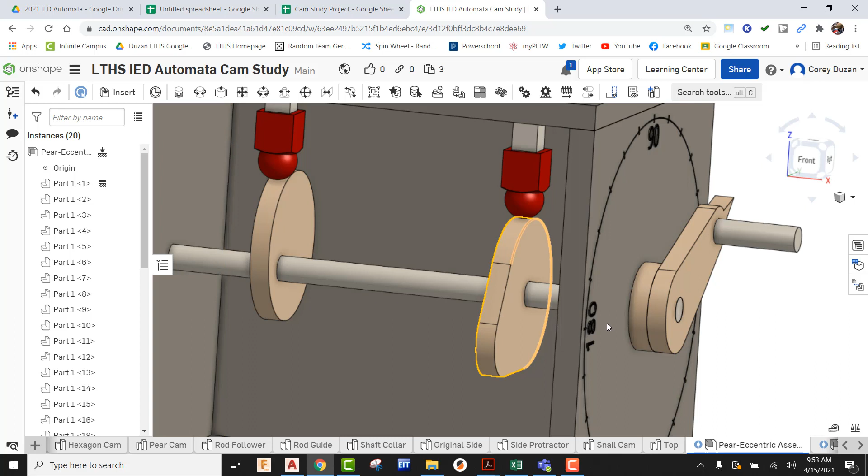I'm also sharing a view-only version of an automata. When we pick on that, this is what you're going to see. If we look down here, we can see one automata that has a pear and an eccentric cam in it. Another one down here, if we pick on that, we can see it has the hexagon and the snail cam in it.

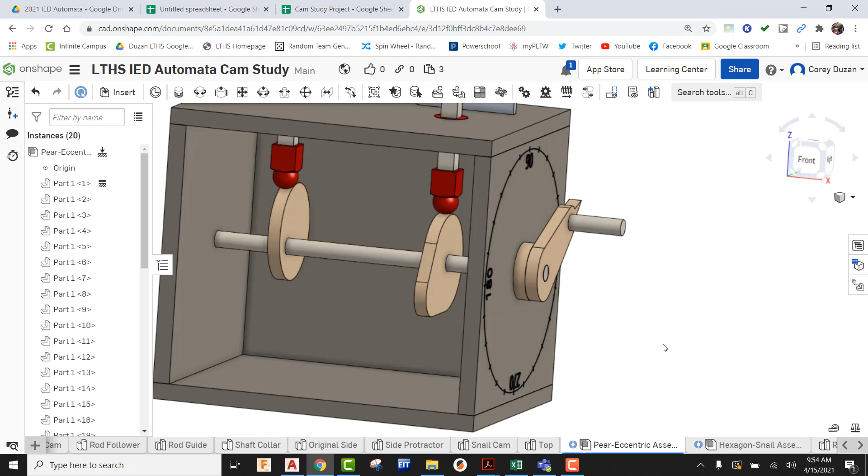So the person who's going to be studying the cam has to go out there and locate the assembly which that actual cam is in. In my case, I'm going to say I'm studying the eccentric cam. So I'm going to pull open that assembly. I can see that this is my eccentric cam, and this is basically where I'm going to start.

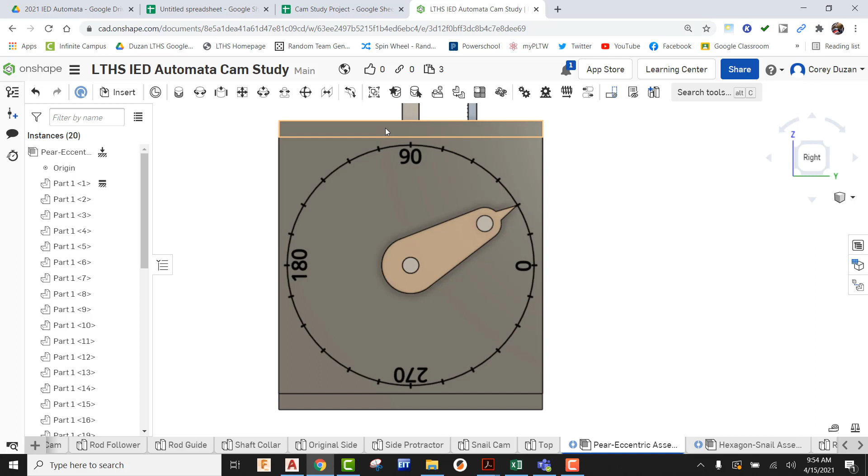If we were to change this view to the right side view, we can see that there are angle marks on the side of the box. We also have our crank handle, but it has a pointer on it. If we take a look at the Google Sheet that we have, we need to find the measurement for angle rotation 0 degrees.

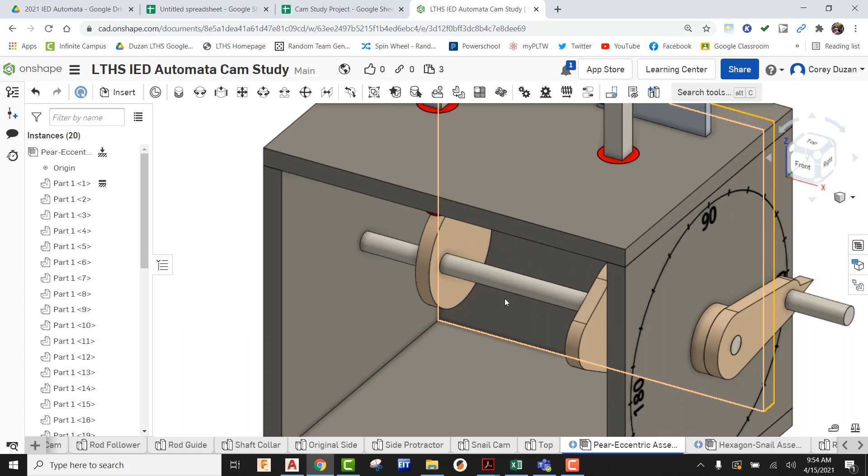I'm going to come back in here and physically grab this with my mouse. I'm going to take the pointer and try to get it as close to that 0 mark as you can. Once we have verified that's on the 0 mark, I can switch the view on this. And now, once again, make sure that you're locating the correct cam. In my case, I said I was doing eccentric. It's on the left-hand side, so I'm going to be doing all the measurement here on the left-hand side.

So to make things easier, instead of using the ruler, what we can do is find this feature down here at the bottom right-hand corner. There is the feature I'm talking about. It's measure, looks like a measuring tape. So I'm going to pick on measure.

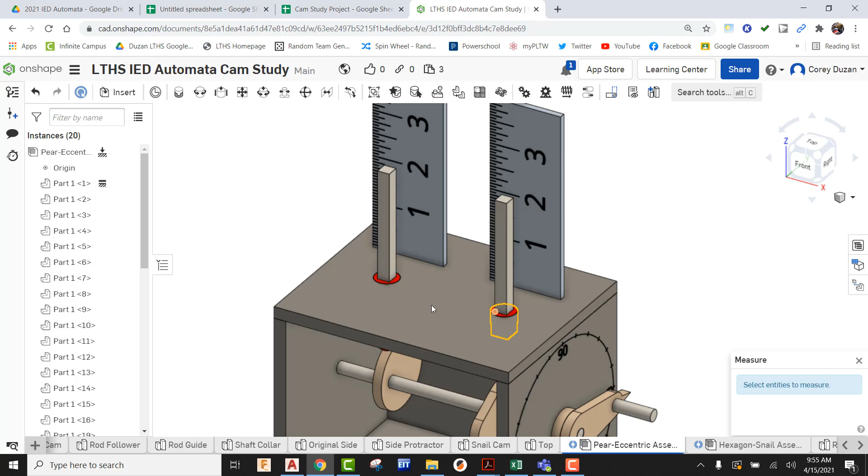Now what I'm going to do is pick on top of the box, and then I'm going to zoom in here and pick on the top of the follower rod. That is then going to give me this distance on top. So that distance is 2.361 from the follower rod top to the top of the box. I'm then going to go into my Google Sheet and type in that distance of 2.361 for my measurement.

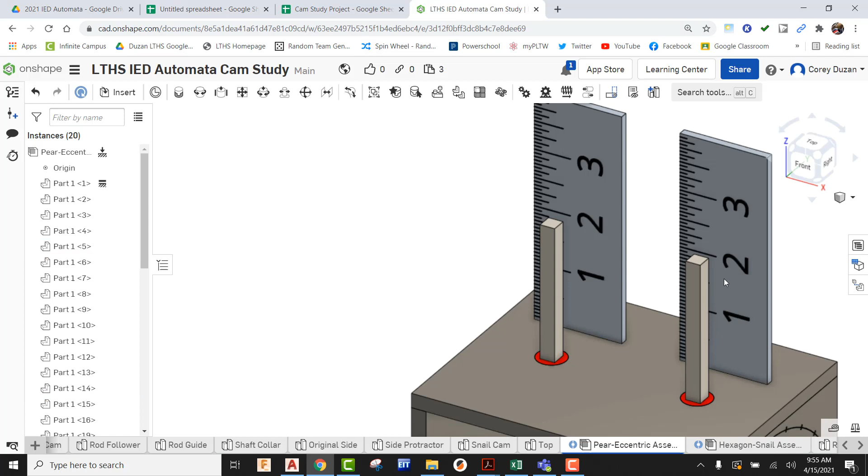I'm now going to jump back over into our automata assembly, switch this into my right side view, take my pointer, bring it up here, and bring it to 15. Like I said, it can just get somewhat close to that actual mark. That's close enough.

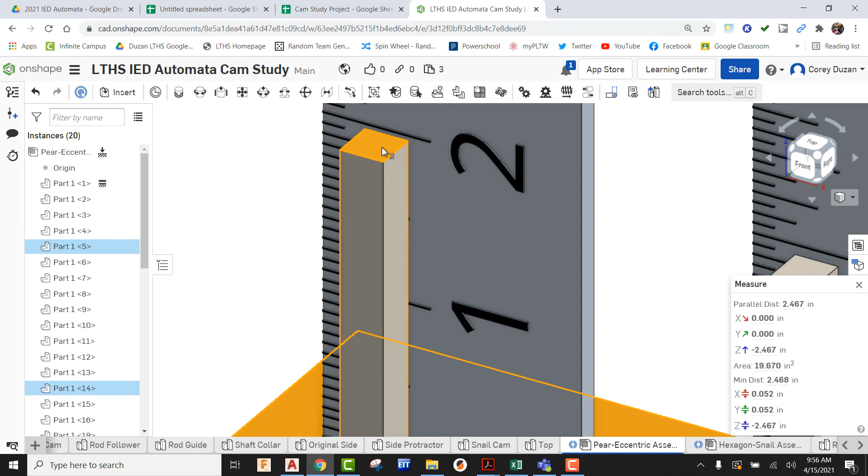Okay, now I'm going to come back in here and get my second measurement. Going back into measure, I'm picking the top of the box and then the top of the follower rod. I can see that is 2.467. Going back into my spreadsheet and typing in 2.467. That was at 15 degrees.

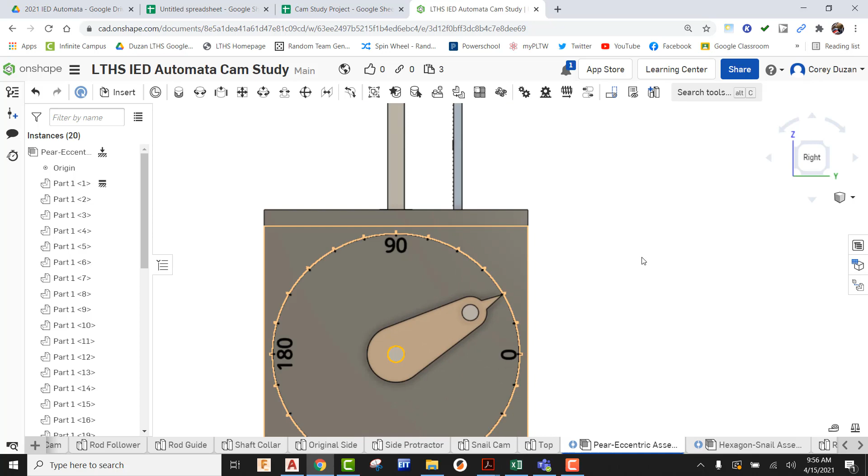Jumping back into Automata, switching this into my right side view. Now I'm taking that pointer and bringing it up here to my 30-degree mark. Pretty close. Bring that into an isometric view. Go back into measure, pick the top of the box, and then the top of the follower rod. I can see that is 2.568. Now I can come back in here and put in 2.568.

You're going to continue on with this process until you have basically 360 degrees, all with those measurements. Once you are done with that, you're going to be looking at a spreadsheet that has all sorts of measurements in it. Now for my case, I didn't want to give you the answers for an eccentric cam, so it's blacked out, but trust me, there are measurements underneath this.

So now what we want to do is create something called a motion graph. This is going to show the motion of that cam across 360 degrees. It's going to show you the up and down motion, the 360 degrees that we actually crank the crank handle.

All you have to do is come here and highlight all the measurements in these cells in B. You're then going to come up here and go to Insert, find Chart, and this line chart is going to show up. We can scoot this over a little bit and shrink this down in size. Then where it says measurement, I'm going to type in eccentric cam motion graph.

So this is telling us what this is going to be doing over 360 degrees. This is showing us the motion of that cam and the rotation of the actual crank handle.

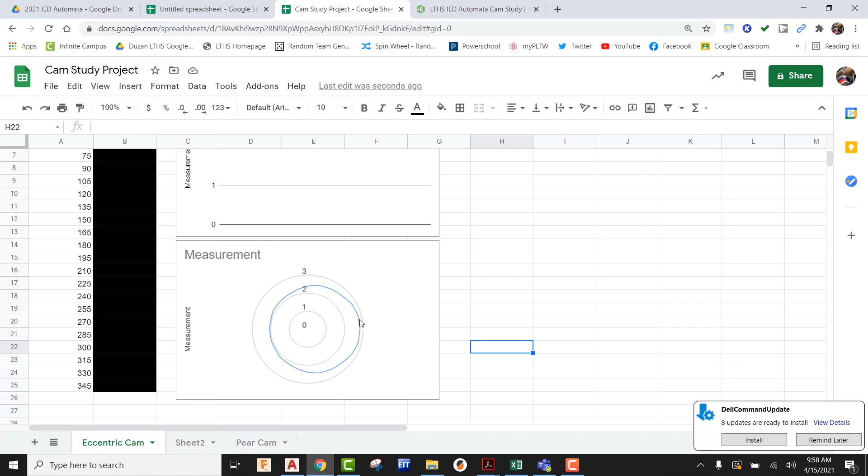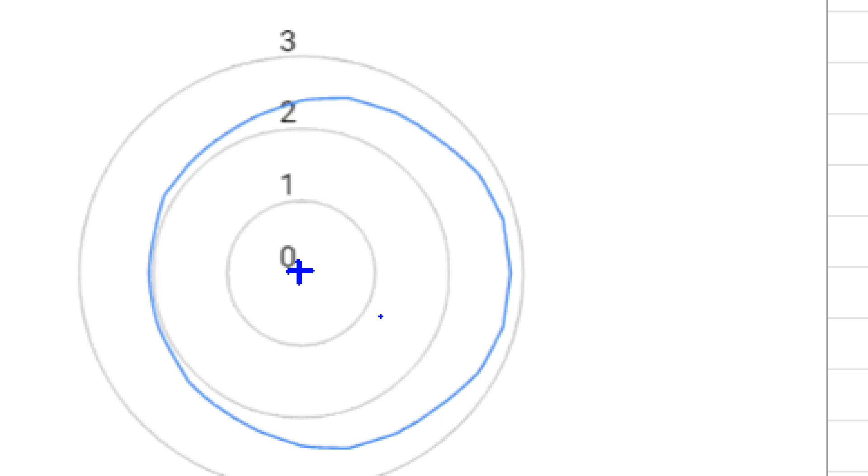So this is now indicating what the profile of our cam should look like. What's interesting about this is at the very dead center of this radar graph, that is indicating to us where the actual axle is that goes through the cam. So I can see this and confirm the data I got is correct, because that is actually the shape of an eccentric cam.

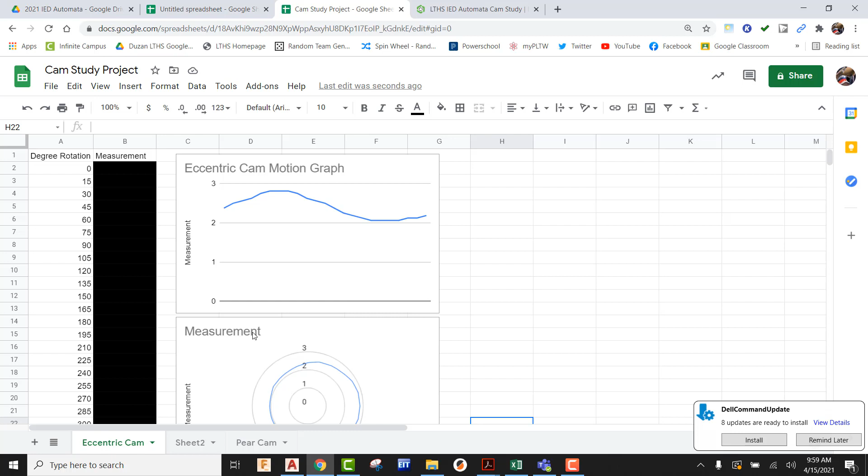Since that is the shape of the eccentric cam, that is basically telling me that my motion graph is correct. So just to finish this up, I'm going to come up here into this label and call this eccentric cam profile.

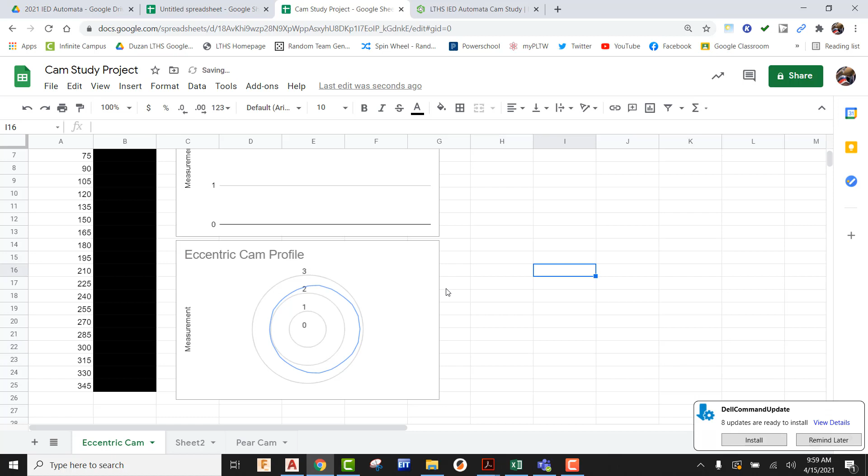So there's a couple pieces of information we got from this. We know what all the distances are. We know what the motion graph looks like over 360 degrees, so that means we know what the behavior of the cam is. Basically the follower rod is going to go up and continue moving, then go down, then go up again and back down. So basically the eccentric cam is going to be creating some sort of a sine wave.

So you have to be thinking about the actions that are going to be happening in your scene on top of the automata. Maybe you want a basketball that's going to be bouncing on the floor. This would be a great cam for that.

That is how we create a motion graph and a cam profile using a radar graph with the information we get for our cam study. All that information now should be in all those four tabs that make up your spreadsheet, your Google Sheet. That's now going to be shared with all of your partners, so everybody is going to be able to understand what the motion graph is for each particular cam, and you're also going to know what the behavior is going to be for that cam in an automata.